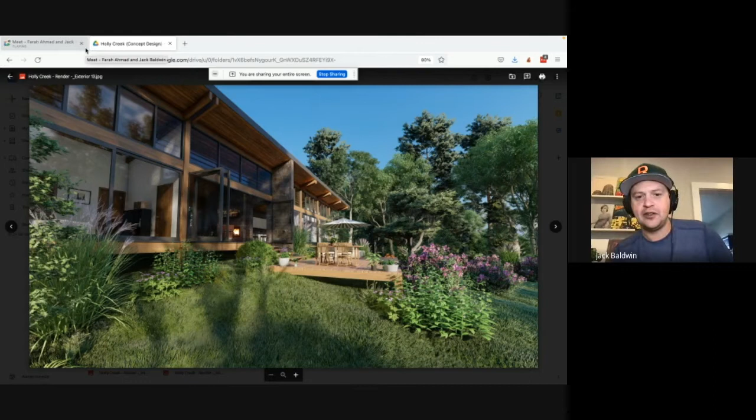And this one's on our website. It's prominently on our homepage. It's called Holly Creek. And I always get a lot of compliments about this design because James Knight, who I mentioned, came up with this, and I think it's a beautiful home. We always get people telling us that they would love to design a house just like it. So what we're looking at here is a rendering. This is the rear of the home.

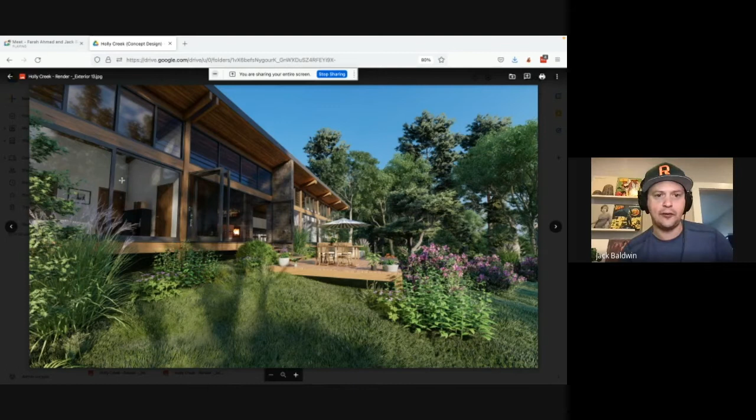What you can see are some big retractable patio doors, a little step down to an outdoor patio, a nice big gradual slope to the rear of the home. At this point, we're south facing. We've got a lot of glass, a lot of windows. But Farah, looking at the rear here of Holly Creek, what are some thoughts you want to get into? Yeah. So, really what I want to talk about is how passive design can invite nature into the home, and this image is the poster child of that.

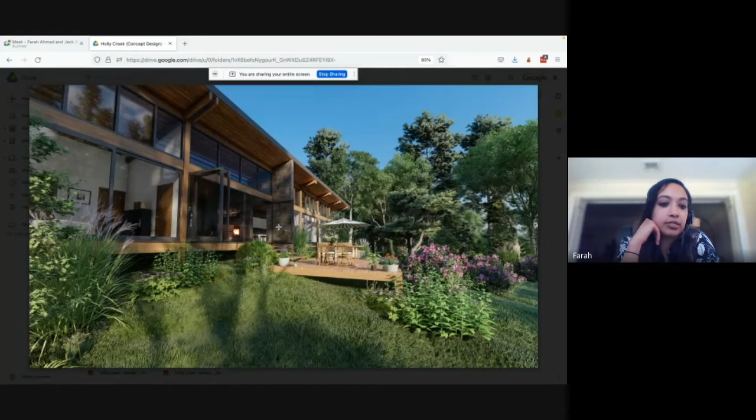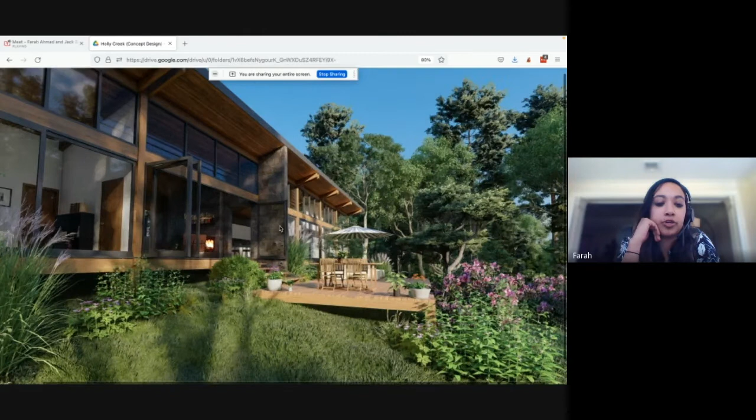And so I really want to talk through some of those exterior elements that you can kick off with to have a passive home. One of the first things that comes to mind, and you mentioned that this is a south-facing home, is really the building orientation. Before you even start building and drafting anything, you've got to do some site survey and figure out how you are going to orient your home on your site to take advantage of the sun and any prevailing winds on that site. So you're doing kind of like a microclimate study

to understand where the sun moves around, where you're getting a lot of your wind direction coming from, and then taking that and harnessing it. So we know that the sun goes from east to west. And so if your building is located on the east-west direction, so that the longest dimension is facing south, as is shown here, then more of your building is going to absorb that solar energy. So if you've got a long axis, a rectangular building facing south, think of the sun starting from the east and going out to west, and how that sun's going to really percolate through your spaces.

So when you have a passive solar building, just to sum it up, you're thinking of a rectangular building typically with the long side facing south. That's how you're going to get a lot of your good heating, especially in a climate where it's heating dominated, and you want to basically maximize your solar gain during the winter and keep your home cool during the summer.

So what if this home had solar panels on it? Would you be thoughtful about where you'd put those solar panels, or does it matter? Yeah, you always want to have your solar panels facing south as much as is possible, and it also plays into the tilt of your panels as well. It's typically within 5 to 10 degrees, but always facing true south when possible, in order to maximize your gain. Yeah, and I guess a lot of times it's very easy to overlook orientation.

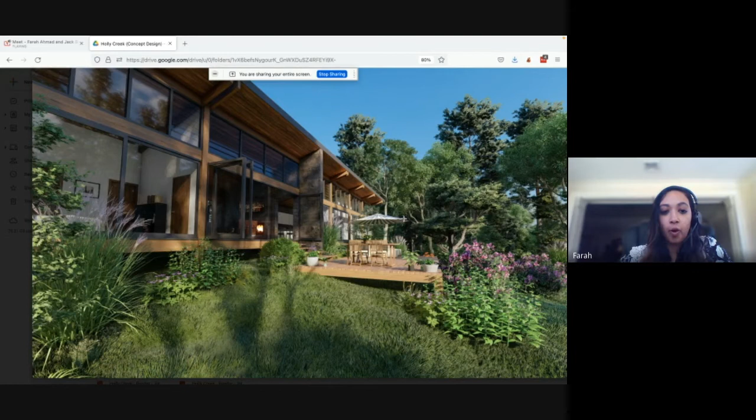Yeah. And a first step to doing that as a client, if you really want to educate yourself: your local building energy code is split into climate zones. So first, you want to identify between climate zones 1 through 8, which climate zone your state is located in. Then you can simply go to your local energy code, which should be posted on your local government's website. Look at the table for insulation values for your wall, and look at a table for fenestration or windows for your solar heat gain coefficients and U factors. And it'll tell you, for your climate zone, what you are expecting.

And so you can take that baseline value and go to your architect and say, hey, this is what we're required to be doing. Can we go above and beyond this? And does it make sense? So if you come to your builder, your architect with that baseline knowledge, that goes a long way. They're gonna know you're paying attention and that you want to do better than the minimum. And we want that. We actually want our clients to come prepared and educated. That actually helps us do our job really well when we have people who put thought into what they're doing.

So yeah, let's go into the next image. This is the front entryway. So from that last image, we saw this big open doorway leading to the back patio. So it sits right in the center plumb line of the house. I love this design because of this gorgeous little wood patio walkway up here, kind of elevated, and then this little stone courtyard with a reflecting pool.

We've got a little place to prepare some drinks or some food, and some couches to sit on. But yeah, big and spacious. You've got the same big opening right here. What are your thoughts on this image, Farah? Yeah, so looking at this right now, it's not a very deep footprint, which is great.

It doesn't look like it's super deep. So in that case, you can really get a lot of cross ventilation here. The placement of your windows and your openings really allow for cross draft, so you can cool your home as needed. This really allows for passive cooling because, again, you can have that cross draft going right through your footprint. And having this elongated narrow footprint just allows more of your space to be daylit.

And you can see here that there aren't a ton of obstructions in the footprint. You don't have any partitions really blocking out any of that daylight. And you've got those clerestory windows that allow the daylight to penetrate through as well. And just another general rule of thumb: daylight really penetrates, that magic number is, between 10 and 15 feet into your space.

So keeping that in mind, you don't want to put up drywall or a furniture layout that obstructs the path of the daylight. So again, this provides that clearance for your room to be well lit without relying on your lighting to be on. Awesome.

Effectively. Yeah, so what you're saying is if you orient right and think right about it, you can have this big open space. You can have big windows, big doors, let lots of air in, let lots of light in, and still be energy efficient. Yeah, and also because the floor area here is more manageable, this isn't super huge, you can really take advantage of all those passive elements of the climate in your home.

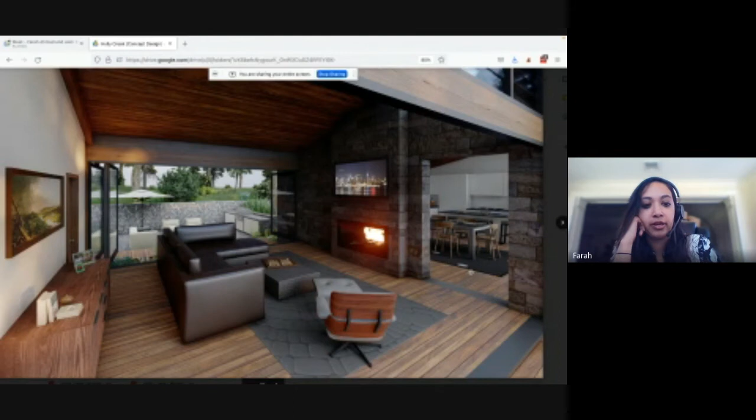But think really closely as we look at these interior shots about what spaces are going to go on your north side and what's going to go on your south side. On your north side, you're going to get a lot of bright indirect light, so you're still going to get really well daylit spaces. But again, if you're gathering a lot during the daytime and you want to take advantage of that sun, then think about what spaces are going to be configured on that side of your home. Yeah.

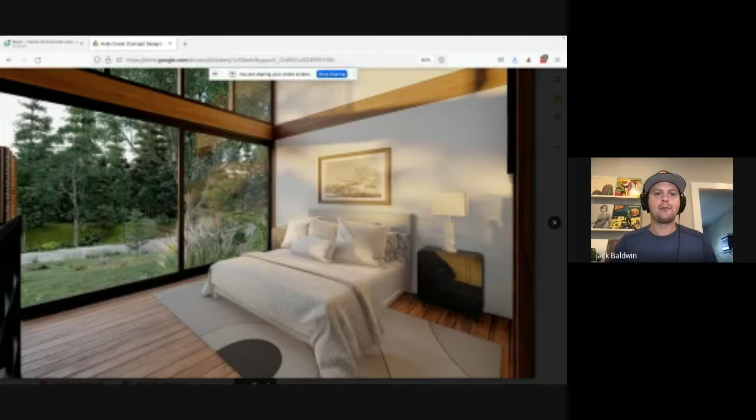So this is the bedroom on the easternmost wing. So we would step from the main living space into this bedroom. Okay. And this is south facing out that window. Oh, this is facing south. Okay, got it.

And generally, we know on the east side, you'll get a lot of your morning light, and then in the afternoon, on your west facing spaces, you get your afternoon sun. You're thinking again about a 9 a.m. to 3 p.m. window to take advantage of all of your solar gain. So these are just things to consider when you're figuring out the layout of your space and also the layout of your furniture too.

So if you want to avoid a lot of solar glare, you're gonna maybe want to think about your TV or any other equipment being placed in view of the sun on the south side. Just things to consider.

Yeah, now we're stepping out of that bedroom. We're looking straight into a shared dining room, kitchen. Down that small hallway, if we kept going straight down, we get to the other bedroom on the other wing of the home. Okay. And then to my right, I'm looking outside to the rear. Gotcha. Yeah, I'm seeing a lot of landscaping here, and that's actually a pretty good point to touch upon.

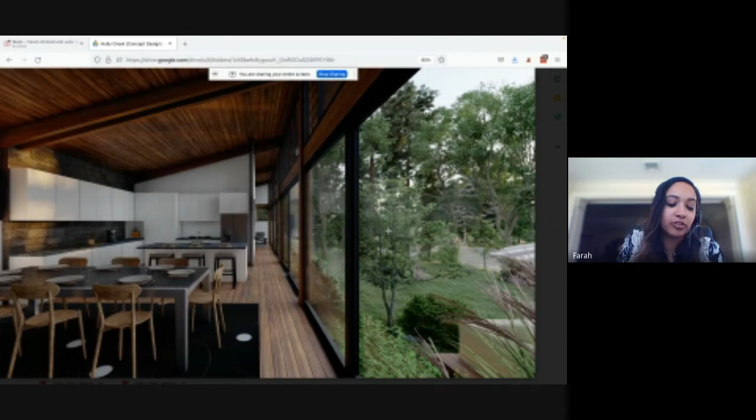When someone comes onto a site, I think the general inclination is to just clear up all the trees and have a bunch of clear land to plot your house on, but there's so many ways to take advantage of the plantings that we have on site. For example, you want to locate your obstructions on the site, like your landscaping or fences or whatever else, so that the full exposure of your sun is available from that 9 a.m. to 3 p.m. window to maximize your solar gain in winter. You want to be aware of heights of other obstructions on your site.

Something else to also think about is the types of trees on site. There are a bunch of apps out there. There's one I use called Picture This. It's something I actually vetted out with a bunch of landscape architects recently, and they seem to use it. So I'm gonna just recommend it as a legitimate source. But essentially, you can snap a picture of any planting or tree on your site, and it'll just identify that tree for you right away.

The reason I mention this is because you've got your evergreen trees and your deciduous trees, and those play a huge role in how you're getting sun into your home. If you have deciduous trees on the south side of your building, that can actually help block out sun in the summer when you don't want all that excessive heat, but then they lose their leaves in the winter, so you can gain solar heat during cold days. So deciduous trees on your south side could be a very good thing for you.

On the other hand, evergreen trees, which don't lose their leaves, might be a great way to block out harsh northern winter wind. So you want to figure out on your site where you could maybe want to have a row of those, either plant them or see where they are on your site already, and site your house and those plantings accordingly.

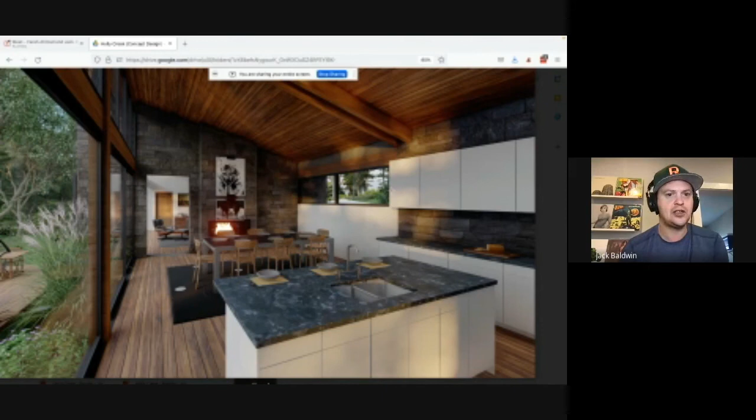But there's also just simple things like orientation, like the landscape design, like the layout of the home. Those things don't cost a lot of money. It doesn't cost money to plan your home a certain way and orient it in a certain way that takes advantage of what's out there. Or like you said, it's required now to do double glazed windows, and they're not that expensive to get a good window and door schedule built out that has a good R factor, that has good U values. They're out there and they don't cost a lot of money.

Yep. And the reason why they don't cost more than what has traditionally been specified is because it's the standard now. Right, exactly. Because the code's requiring it, all the manufacturers are following it. So that's the trend that we're going to see in all sustainable design technologies: once you create a standard for things, the economic competition sort of just levels out, where everyone's pricing it out the same because there's no other means.

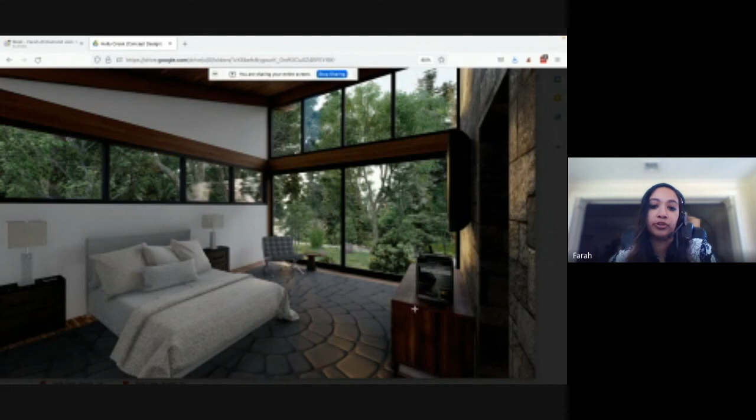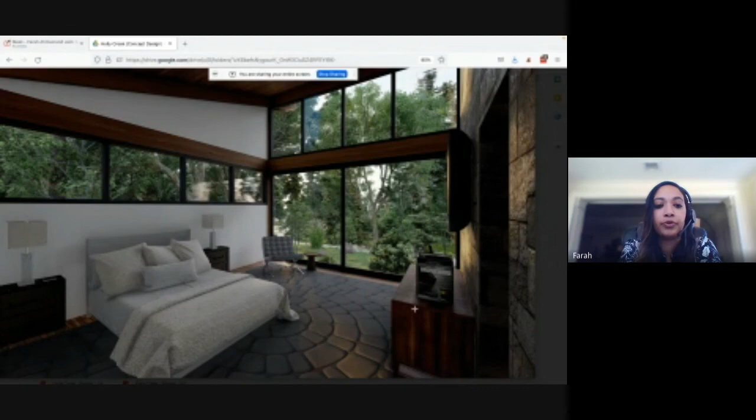And that's the thing. You don't have to overdo your investment if you think wisely and think long term about what you want to get out of your home. This isn't a huge home, but I think we've pointed out some of the ways that in the design we've tried to take advantage of a sustainable concept. Yeah. And I love that we're kicking off this series with passive design because it's really about reducing your loads first before you add on any supplemental technologies to reduce the load further. Just create a manageable footprint. So I think that's the takeaway from today: be very responsible with your building footprint and be very intentional so that you can reduce your loads from the onset and then we can manage them later.